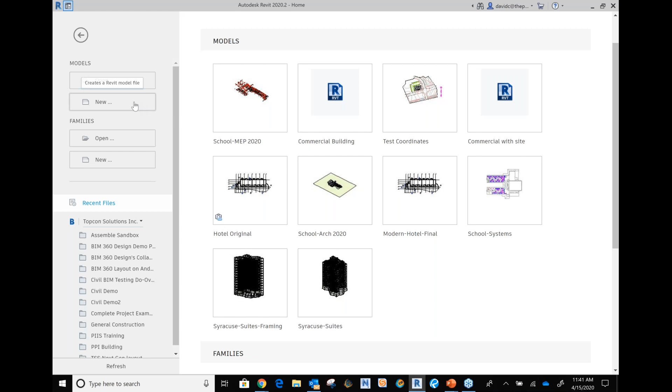So in Revit here, what I'm going to do is start out with a new model. I'm just going to go into the architectural template and okay. A couple things I wanted to talk about as I get into this - of course, the survey and base point, but also let me get into my 3D view here. I wanted to talk about the internal origin.

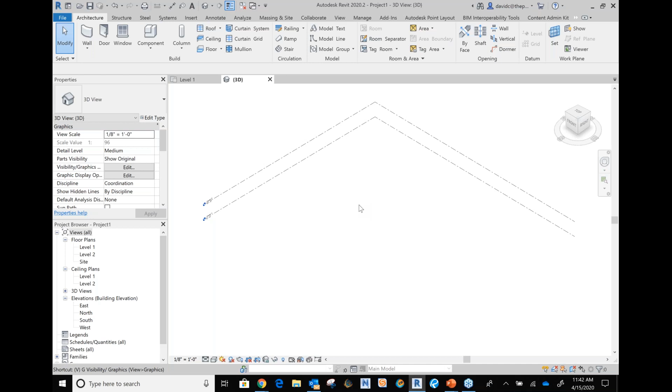The project and base points, as well as the internal origin, are going to be found under Site in your visibility graphics. So here's the internal origin, here's the base point, and here's the survey point. Of course, with this template, everything's located at 0, 0.

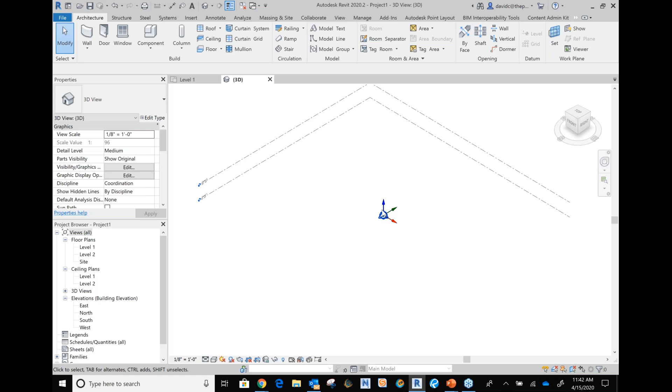With positioning of these models, being able to show that internal origin in both models is going to give you a really good idea, when you're bringing them in, of kind of what's located where. Now I'm going to go ahead and turn that internal origin back off, since I just wanted to highlight that really quick.

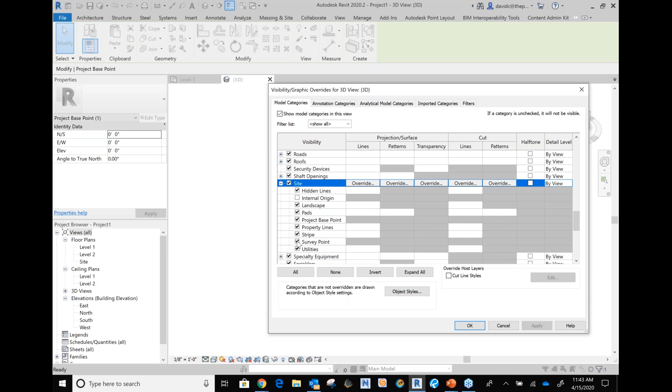What I want to work with here is our project base point. For those of you who don't know, let me go back and turn off the survey point so I can specify the difference here. Okay, this is your project base point.

To me it kind of reminds me of the X-Men symbol, right? You're looking at a circle with an X through it. The project base point defines the origin of the project coordinate system. It's a reference point for measurements across your entire site. Really, this is referencing where your project is.

Then we have your survey points. Let me go ahead and turn this one off for a second, and turn this survey point on. Your survey point is the little triangle with an addition symbol in it.

Your survey point identifies the real world location near the model itself, such as a corner of your property or site, or maybe an intersection of property lines or a geodetic survey marker—you can utilize that as the survey point. That's going to be those real world coordinates.

Excuse me, just grabbing a drink of my tea there. So I'm going to activate this base point again.

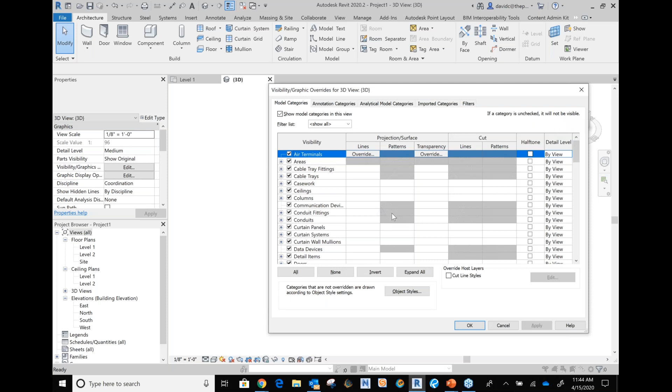What I want to do here really quick, and this is the kind of primer I told you guys about: I've activated the project base point and the survey point, and I'm going to draw a detail line. I'll probably need to get into my site view first—that'll make it a lot easier. I'll get into my site view, then activate the detail line.

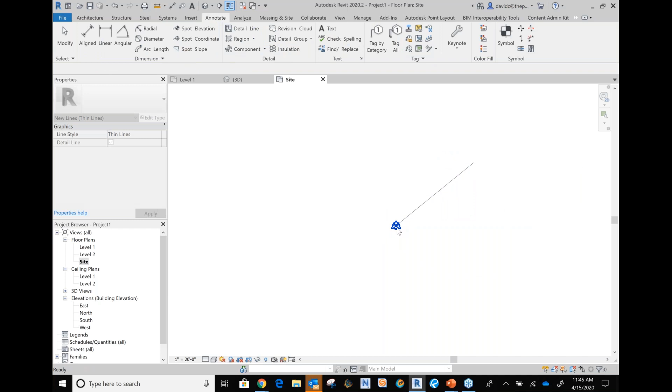So what I'm going to do is draw a detail line. It doesn't matter what the length or angle is, but I'm going to start right at the origin here, right at the center of your project base point and survey point.

After I've drawn that detail line, I'm going to draw a spot coordinate off the end of it. That spot coordinate tells us exactly where this is located. So of course this is 0, 0, right?

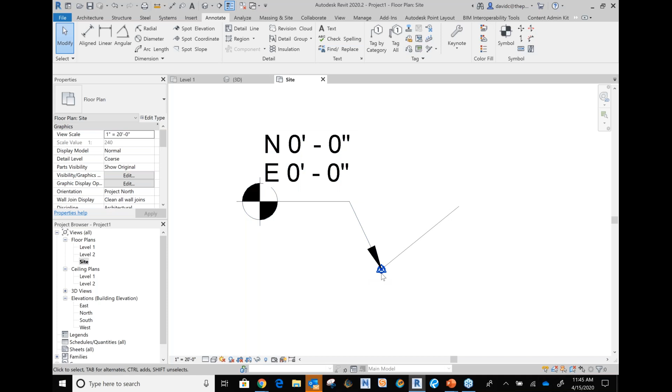So let's say that I grab my base point and I move it. Notice this does not change at all based off me moving that base point.

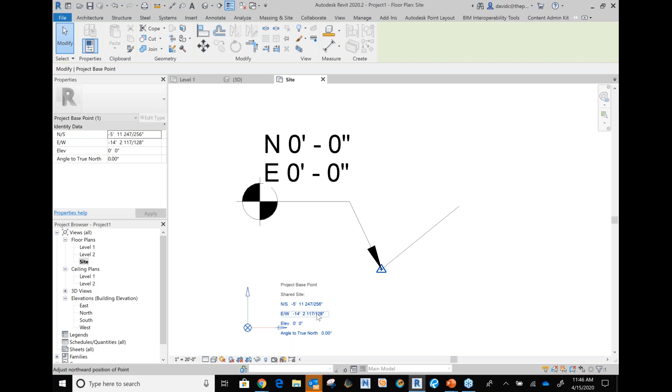It has a new east-west, north and south—so it has new data here, it's reading this new data. But again, we know that this project base point is going to be my origin, right? So I want to specify this.

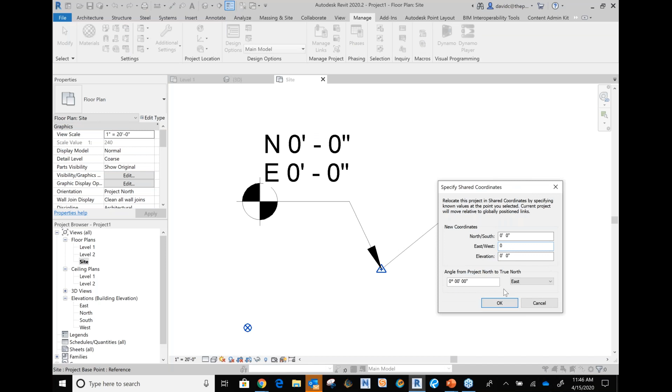That's where I'll go to Manage, and I'm going to specify coordinates at point. This is me telling it, I know where this is. And when I choose this base point to be 0, 0, this changes to reflect that.

So I just wanted to give you guys an idea of how these coordinate systems can work. Now I have another example where I can link another model in, and we can acquire the coordinates from that, do all that stuff. But what I plan on doing now is, since we all have a good basic understanding of this coordinate system, we're going to start by linking, let's say, a CAD file.

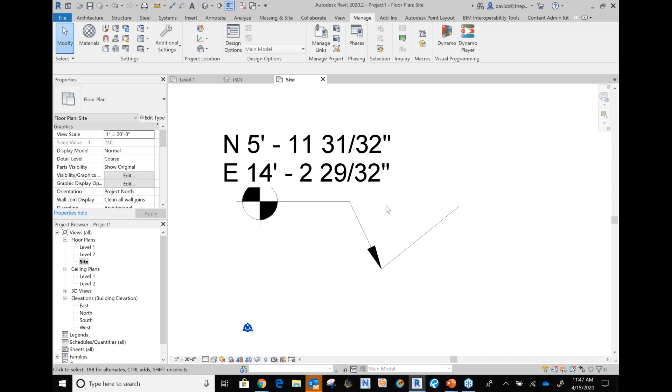I'm going to get out of this, and let's stay in this architectural template here. I'm going to undo most of this stuff and get it back to normal.

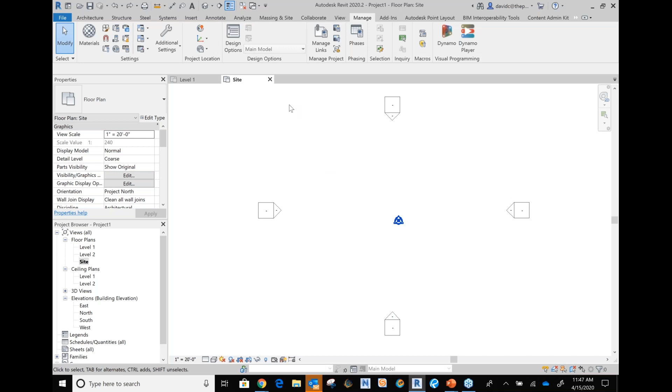So what I want to do is acquire the coordinates from a DWG, and pull that survey data. When I do this, I can go to Insert and link topo or link CAD. I'm going to go ahead and do link CAD for now, and find my documents here.

Okay, what I'll do is grab my DWG or Civil 3D file, as long as it has coordinates published in it. Now you can choose to go origin to internal origin, which is generally really good to do, other than doing the maybe center to center.

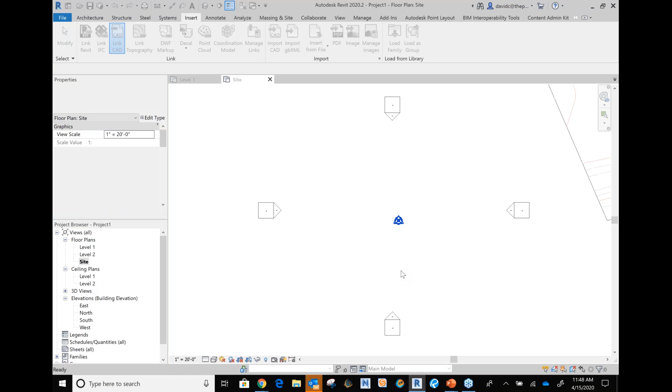But I'm going to go ahead and make sure current view only is checked off, by the way. I'm going to bring it in, and there it is. So when I need to pull that data from that CAD file, this is where I'd go to manage and then acquire. So I'm actually going to pull the data itself.

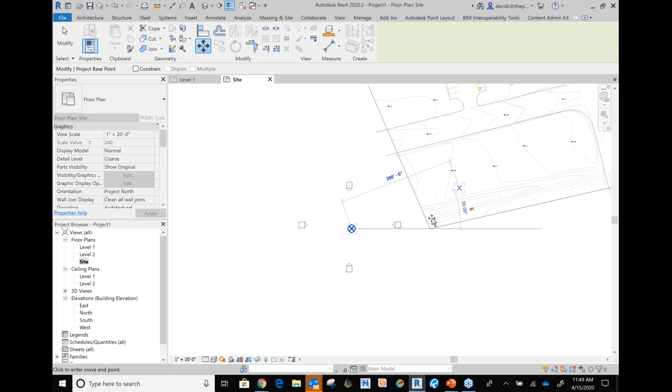And what I want you guys to watch here when I do this, watch the survey point. Notice that the survey point itself has moved to the corner, essentially the corner of the footprint of my building, right? So we know there's a marker here for the site. In this case, I could grab my project base point, move it over to this corner here, and position it where I need to.

Now, in this sense, I have the coordinates for this DWG in this blank model, this nice little template here. Let's say that I want to position my building on this, right?

Now, some of you, the way that this has been done before, and I've been guilty of this too, believe me, and I've learned the hard way with it: I'll link in this CAD drawing into my Revit model, and maybe try to move that CAD file to where it needs to be so it lines up with my Revit model, or I move my Revit model and try to position it right onto the footprint of this CAD file.

And the problem with that is, as you guys know, you either change the coordinates or positioning of that DWG so it goes where it needs to go, or you're leaving elements behind within Revit that stretch if you have a curtain wall or anything like that. Some don't like to be moved. You can break any of your joins, different things like that. We all know those issues, right?

So what I would say to get around all of that is to use something like I'm doing here with this architectural template. At this time, I could go ahead, insert, link Revit, and grab my Revit model. Now I'm going to do it to internal origin, and that's fine.

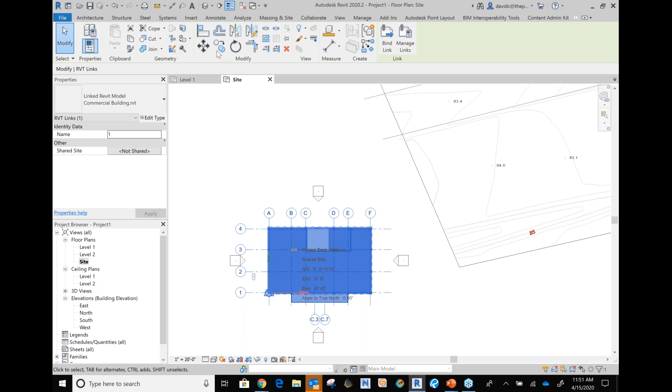Okay, notice this is where it's gone. So I'm going to grab this link at that point, and maybe I want to pull it in with the survey point, or maybe I just grab the corner. I'll do the corner here. Probably would have been better off with the survey point, but there we go. And what I'm going to do from there, rotate it.

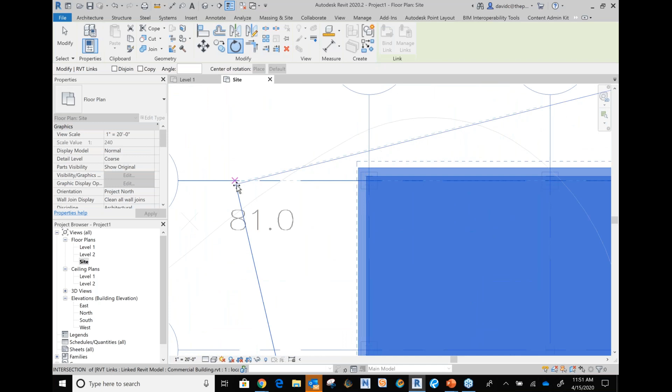Okay, so now my building is positioned on the site. At that point, that's when I need to go ahead and actually go to manage and publish coordinates. Okay, so I'm going to publish these coordinates.

Now, the nice thing here is this pops up asking what the site name for this positioning is going to be used. So if you guys are working on bigger projects with multiple buildings on a site, you can name these individual positionings for these buildings based off of that, so it knows where to go. Especially with wastewater treatment facilities where they have so many different buildings, it's very common to see multiple sites set up so they can assign that positioning to those different buildings.

It's a great tool. In this case, I'm just going to use the internal. I could rename this to my site or building positioning, but I'm just going to leave it with the internal and say okay. Once I've done that, I've published these coordinates into this model itself, okay?

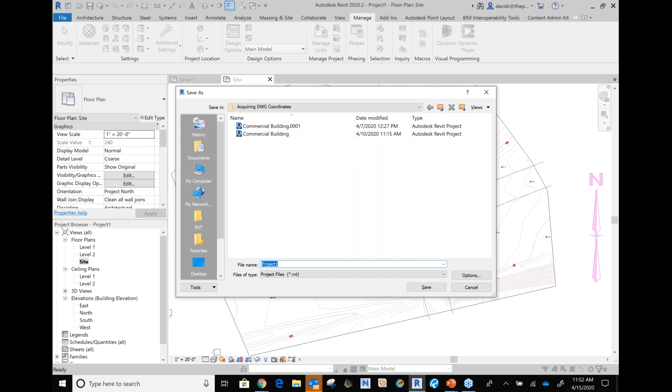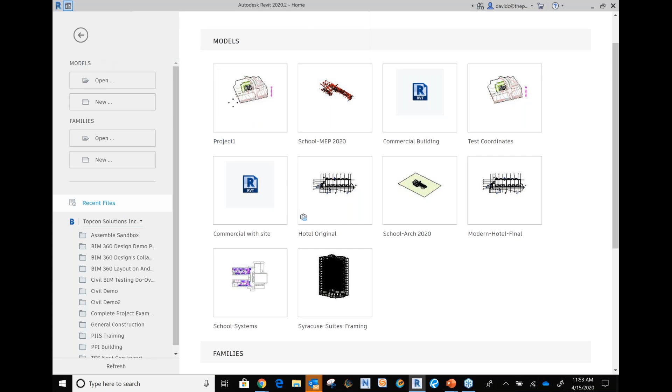And when I go to save, let's actually say I'm going to put this as, yeah, we'll just call it project 1. Let's save. It's going to ask me to save this current position into that RVT model. So if I save this back in, that information is now stored inside of that Revit model, okay? So just to test this out, let's say I go into open, I'm going to grab that commercial building.

And let's say I go to site, insert, link CAD, and I did not link either one of those. Honestly, I did it through that architectural template. And at this point in time, I'm going to go by shared coordinates, hit open, and there it is.

So this positioning is saved back to each one of those models, the CAD file, the RVT model, whatever. I like using those kind of blank templates, or in-between models, to really get all this data together and position these buildings. And as I said earlier, when they're links, I feel like it's a lot easier to really move them around and manipulate them as needed.

And in that sense, you guys can also go through and make any adjustments when you open up the actual model itself. Let me see if I had anything else here. Did you guys have any questions based off of that? I know that was quite fast and furious.

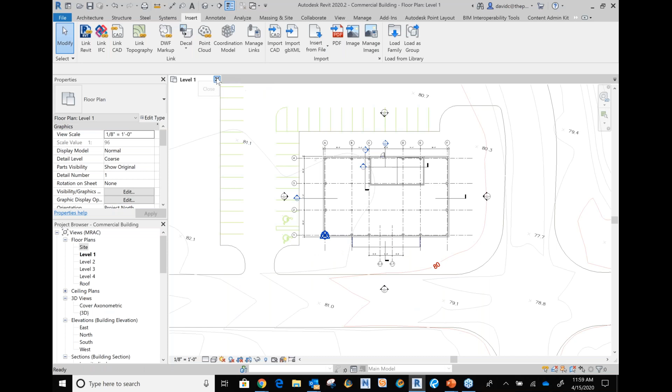Yeah, of course, that'd be great. Okay, excellent. So I'll go back again and do new, and do an architectural template, and I'll start back from the acquire coordinates. Does that sound good? Okay, we'll go do here.

So essentially, again, I would go ahead and insert any model. In this case, I'm inserting a survey, going from that CAD DWG, but if you're structural or mechanical focused and want to pull in this architectural model, it's the same kind of workflow. You can acquire the coordinates from that and then position your model and save it.

So in that sense, I would go link CAD, and I can also do Revit, just strictly Revit if you wanted to do something like that as well. Now, since I'm going brand new, I'm going to go origin to internal origin, origin to origin, and bring in my DWG here.

At that point, I would go to Manage and acquire coordinates here. This is under project location and acquire coordinates. What I'm doing is matching the real world location of any survey marker, that geodetic survey marker, or intersection of property lines, corner of the site, or corner of the building in this case, from that model. At that point, I've acquired the positioning of that model. It knows where it is.

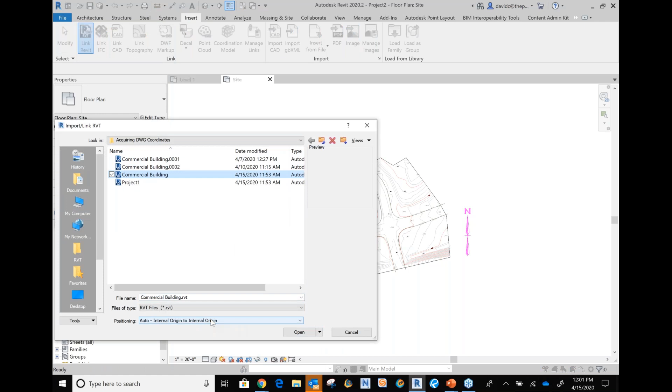So if I go and move this one again, maybe I'll just put them right over the top of each other. Okay, at that point, this is when I would go ahead and link in my other model. So I'd go ahead, link Revit, and grab that commercial building, internal origin to internal origin, or center to center.

Okay, and again, at this point, I like using these links because they move a lot easier, right? I just don't have a lot of things breaking, anything like that. And it's not moving anything in my model itself. It's really just going to save these positioning, like the coordinates, to it.

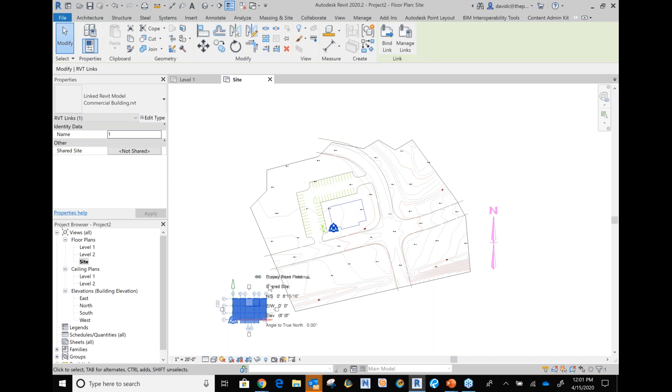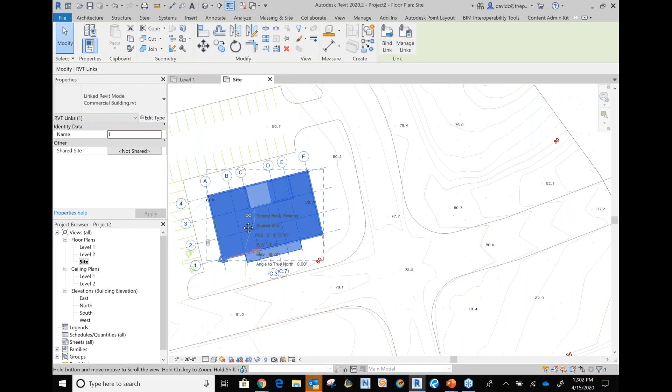So I'll go ahead, move this, put it right here. Again, I'm going to rotate to position my building. All right, now once I have this building placed where it is supposed to be, that's where I go to manage and publish coordinates.

So because this is a link, I'm going to publish and tell this building exactly where it goes on this site. Now, in this case, I didn't do this last time, but I could say building site. Okay, and at that point I say okay. And that is the name of the position of this building.

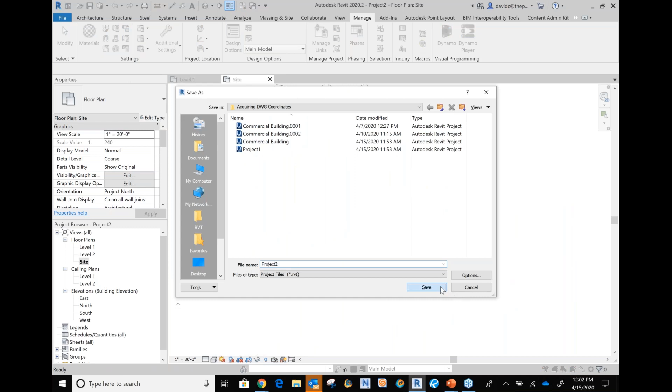Okay, now I would save this, because once I save this, it's going to save the positioning of these models back into them, back into the DWG, back into the Revit model itself. And here's where I go ahead and hit save the position back to the new link.

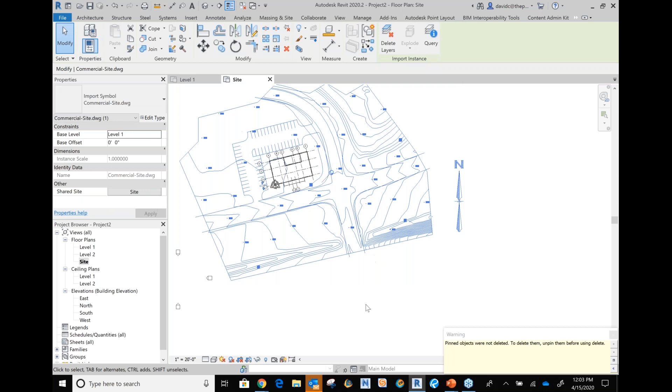Now, if this is coming from BIM 360, what I would need to do is actually, I might have these models there. So let's do this. We're going to go architectural template. All right, so for those of you, let me move this off, that's probably real annoying.

For those of you using BIM 360, for this I would need to go ahead and make sure you guys have that desktop connector installed. You have active permissions to get into the folders and docs, and you have that design collaboration enabled.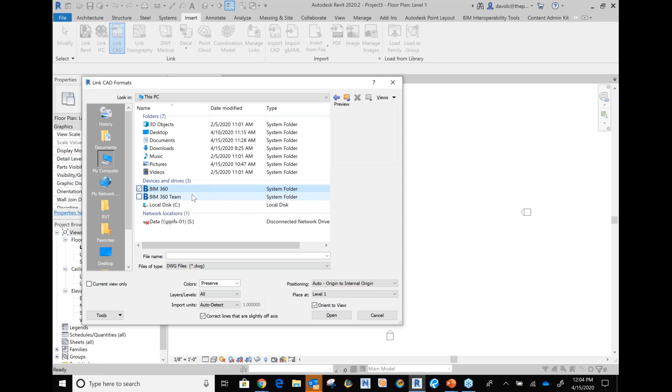At this point, I can go insert, and let's say I'm going to link CAD. This time I'm going to go from my computer. I'm going to find BIM 360. There we go, find my account, find my project, and then find the files that I would want to link in.

So if I have a civil team... that's not the one I wanted. Let's see if I have any other. Well, you know what, just to do it, we're going to go ahead and see if I can use one of these anyways. I'm not sure exactly what are in some of these.

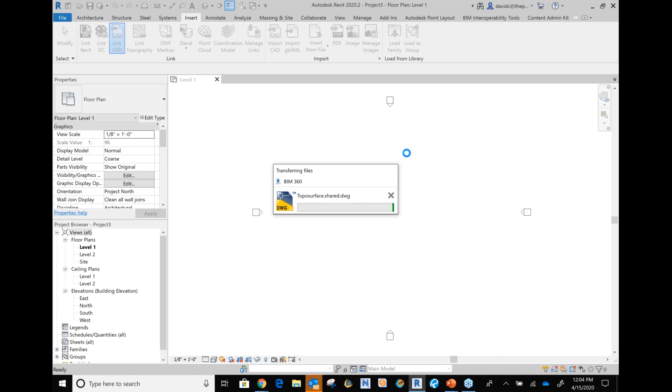Now, one thing to note is that... sorry, I gotta grab one of the models that's been actually exported for Revit usage. Wish I'd prepped this one out a little more for you guys, but let's see if I can find one in here. I know there's one in here, but let me check my links. Nothing. Okay, so I'll grab one of these. I know I have one in here.

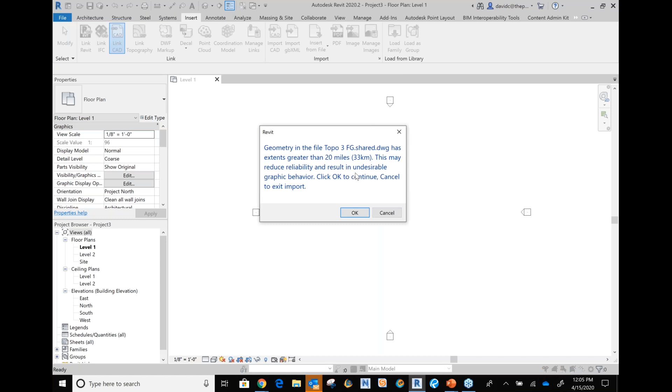Here's the finished grade. Let me try this one. Nope, not gonna let me. Okay, so obviously I need to get... and I know there's one up there, but you know what, let's actually just go straight Revit and forget about the CAD stuff. It's possible to do it through CAD, and I could definitely work with you guys if that's something you're curious about, I just need to get the models lined up first.

Anyways, let's say I wanted to go and link in... where are you? My structure, if I have a structure and an architectural... so I'm trying to find a school project here that I have. All right, let me see if I have another project. Sorry guys, man, I should have prepared for that one a little bit better. But I'm going to make you multitask while you look for another project. Maybe I can read a couple of the questions I think can be answered without necessarily showing on screen.

One of them was whether this feature exists in Revit LT. Are there limitations to the shared coordinates in Revit LT? I'd say shared coordinates, I would think they would work, but honestly I'm not sure because I know you cannot collaborate with Revit LT. You should be able to link though. That's a very good question. I'll have to get back to you on that one just to make sure. Yeah, we'll look a little bit deeper into that.

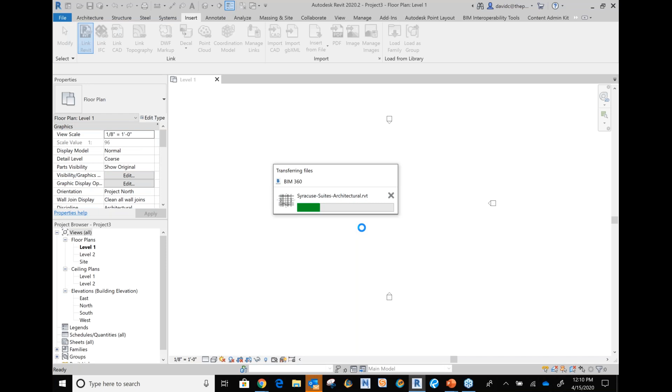I didn't upgrade it before. All right, well, brought in, sweet, okay. So now it's here, okay?

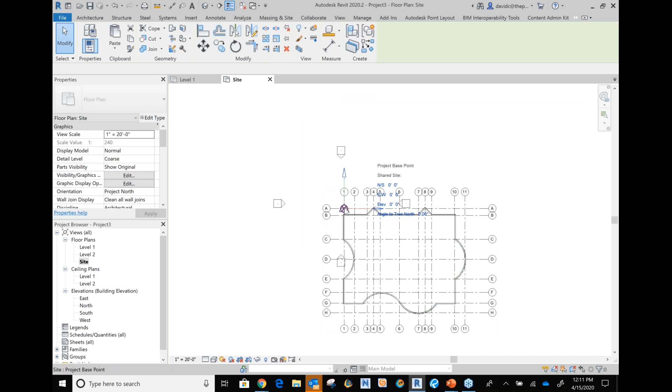And at this point, if I wanted to go into my site, since this is the architectural model, SI, right? And I'm gonna bring up that project base point and my survey point, which they are turned on here. Oh, there they are. Well, that's nice and lined up. If I do the manage and acquire coordinates here, to acquire them off of that architectural model, it's not gonna move because there it is. They're lined up on it as I brought it in.

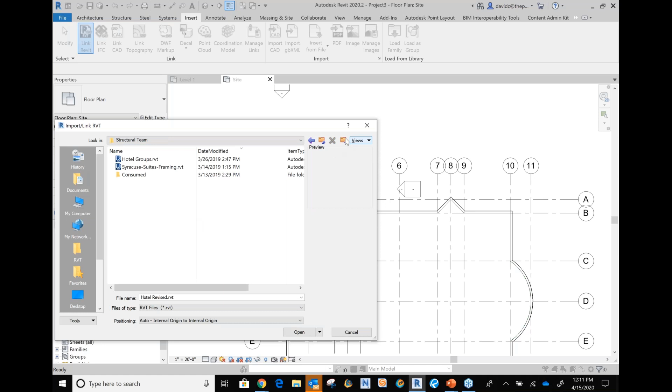But in this case, again, I would go ahead, insert, link Revit, and maybe find, actually, I know I have a Syracuse Suites on here. So that would be a good one. Grab my structural model here. There we go. Okay, so here's my framing. Now here I have my structural model. Okay, so I'll hit open.

Of course, I didn't upgrade that one either. But you know what? In BIM 360, if you guys are working in 2020 and you need to upgrade it, there is a nice cloud model upgrade feature in BIM 360, so you don't have to do it this way. And it does take less time, and it's a good way to get all of those models. And if you have a bunch of links for it, you can get all those links kind of upgraded in that folder. So definitely a nice feature that I should have utilized before this, but we're waiting on it.

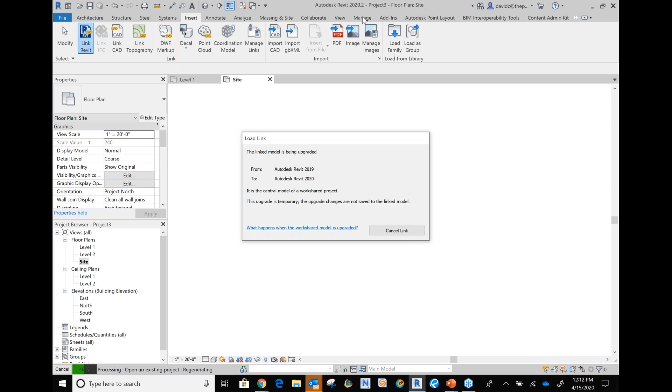What I want to say is, if you guys have these models, so if you're, let's say, going up to BIM 360, like you've been working on a Revit model, you've had links in it already, and you're pushing this up to BIM 360, you will have to go to that manage and manage links, which I'll show that one here.

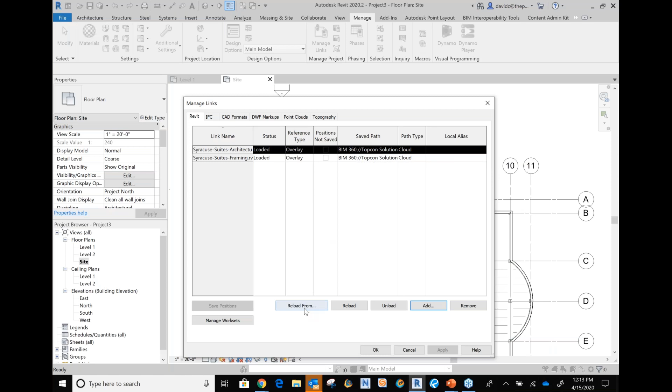Inside of this one, I'll go ahead and show you guys this. But you're going to do the reload, reload from is really what you'd use. So if I know where this model is, which right now it's telling me it's in the cloud, it's in BIM 360, okay? So it knows where it is at this point, I'm good to go. But if it didn't, this is where I would say reload from, okay? And then choose that BIM 360 path.

Now, since I have my models linked together, this is at that point, that's when I go manage and publish coordinates and grab that model. I could rename it to structural, whatever I need. I say okay. Because I didn't upgrade it, it does not want to. Okay, so can we go save? And we're just gonna put that up there anyways.

Right into BIM 360, I'm gonna put it right up there. Okay. Now let's see if it'll let me. All right, well, I needed to upgrade that model.

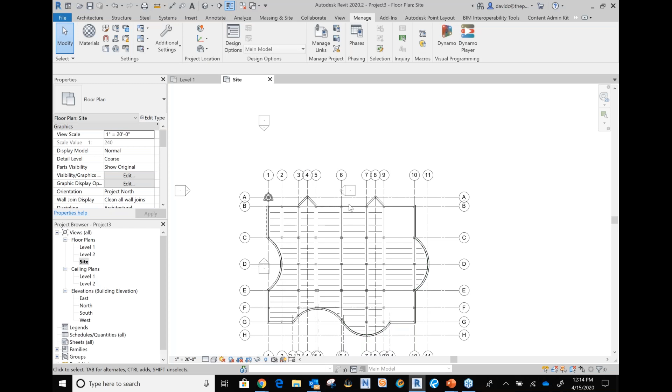Once I upgraded that model, and that's before opening it, but once you do that, you can publish these coordinates right back into that model, and then it's gonna save that information to that model. So when we go to link them from then on, they're gonna line up just as nice as they are right now, except nothing is really ever this perfect in a realistic world, right? Usually there's little kind of speed bumps throughout the whole process, but at least with BIM 360, it's a nice, easy process because I know where the links are going to be.

And again, a big thing about BIM 360, I was going to see if I actually, you know what, I will pull this up real quick and go to BIM 360. It's probably going to take me to glue. No.

So what's nice about BIM 360 is the fact that you guys have versioning, right? It has version control, so as these models are getting updated, as they're either uploaded into BIM 360...

Or let's go into that complete project example. If they're getting uploaded to BIM 360, or if your users are working in Revit and collaborating, you're going to go ahead and synchronize to Central. You can host your Central models here, all in BIM 360, host the links, everything like that.

And when these models update, you're going to see I have version 8 here, version 2, version 3, your link is updating. So if we pull this link, let's say you have permissions, you're working on the structural team, and you have permissions to view this design team here, you can view these models and link them in. Then when they synchronize or publish, you can see everything that updates inside your Revit model because you have it linked in.

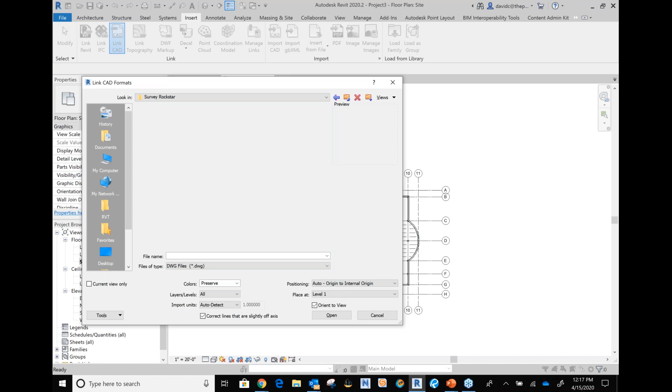I was going to say I may be able to search through here, but I really don't want to take up a lot of your time this afternoon searching through my different folders hoping I have one. But yeah, you guys would just link that CAD file, and as they save changes in CAD or Civil, that link is going to update for us.

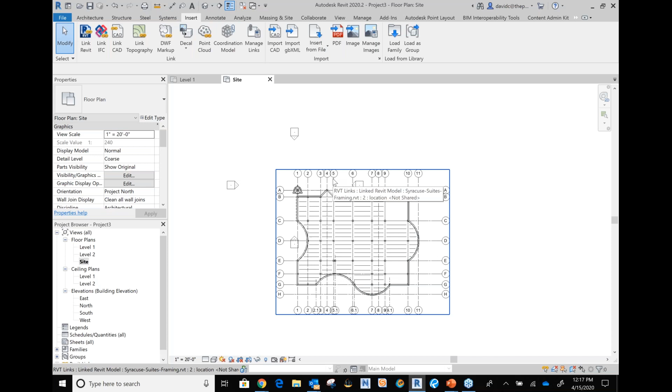Okay, we do have a couple of questions all revolving around the same topic. There's a handful of people asking to review or explain the difference between clip states - clipped versus unclipped. There's even a question about whether that's been done away with in 2021, so maybe somebody doesn't love that particular feature too much. Maybe you can go into a little more depth with the clip states of the survey point and base point.

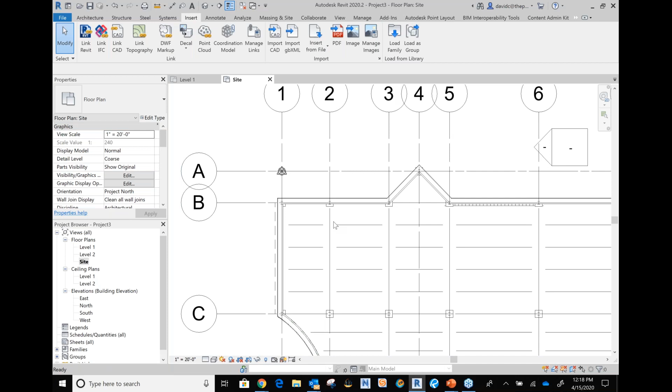Okay, clipping, got you. With clipping and unclipping on the survey base points, you guys are talking about when they are clipped here in terms of saved, and when they're locked and unlocked, right? Especially with the survey point, I know there's been quite a debate with this. I keep trying to grab it, I keep grabbing my link there. There we go.

So with clipping these, really all it's doing is - if you unclip this survey point, you can move it wherever you want, and it's not really changing the information of the model itself. So if I go into my elevations, until I clip this saying that's where it is, I'm going to move it around, and when I clip it, that's where it's supposed to be. It's where it's supposed to stay.

That's about it. I was going to say that usually I see these things staying clipped. I don't see too many of them that are unclipped, unless they have a big survey site - pulling a big survey coming into Revit - and they might unclip it.

This is something maybe I can talk to you guys about offside of this, because it's something I think I would need to look more into to get more in depth with it. I just know that it's essentially locking that positioning of that survey point to something like this - this is it, that shouldn't move.

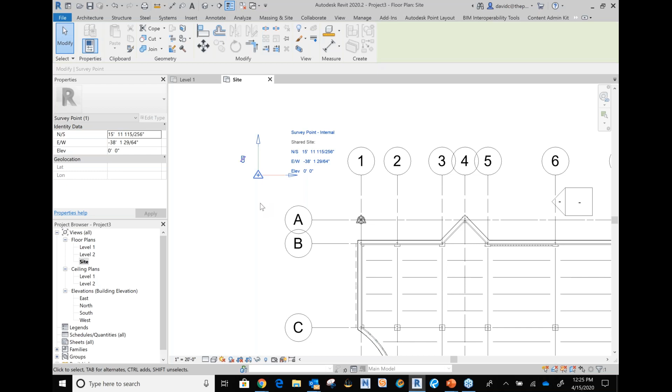So when I go back into my model, it's not going to change from where you had it when you open it up. It's just when you link in other models, you're saying this is where it is. So if that architect happens to do that, what I would do is go through that process again, which is annoying, but it does correct it.

So the first question looks like, does publish coordinates work with models located on BIM 360? Let's test this out.

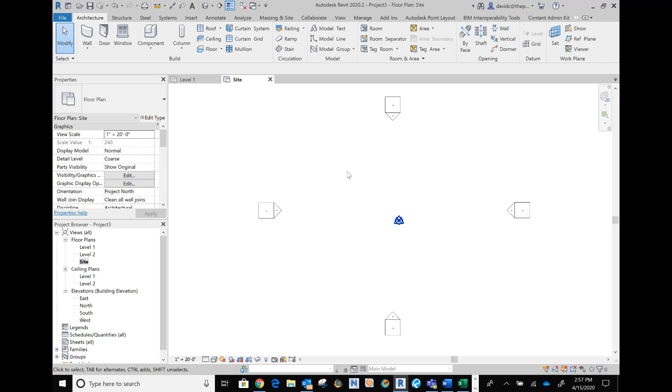I'm going to go with a new architectural template. By the way, since I had some time, I went ahead and prepped a little bit better this time and put my models onto BIM 360. You guys remember that awesome school I was telling you about earlier? I went and loaded it up so I could use it this time. So I'm going to go ahead and start with my architectural model. Notice I've started in a base template on my local.

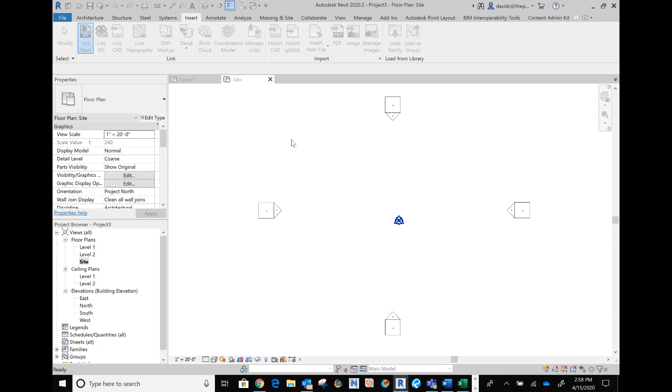And I'm just going to go ahead and link these in. So I'm going to start with this first one, internal origin to internal origin, and then go. Okay, it's going to bring this model in, and remember, as we talked last time, I'm going to go ahead and acquire the coordinates off of this model when I pull it through. As soon as it populates here, I'm going to acquire the coordinates.

All right, so that link has populated. So what I'm going to do is, of course, manage coordinates and acquire coordinates. As soon as I acquire, you're going to see my survey point jump to match the other survey point. So there it is. Perfect.

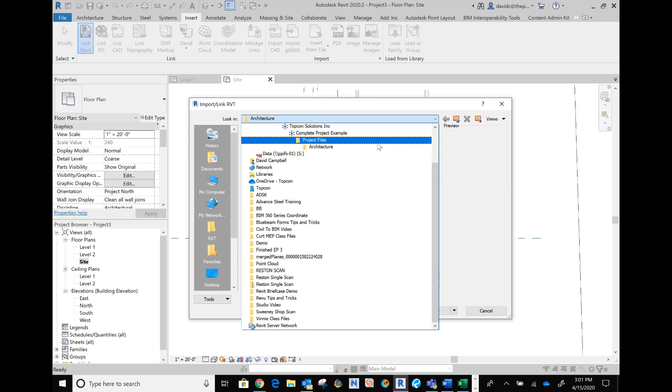So now at this point, that's where I'd go ahead, back up, link Revit. And then I will go ahead and find my MEP model. So here's my MEP model, and just to make this difficult, a lot of times we hope that the origin is going to line up. If everybody models off origin to origin, it would make this process so much easier, but that doesn't happen. So what I'll do is I will go with manual base point.

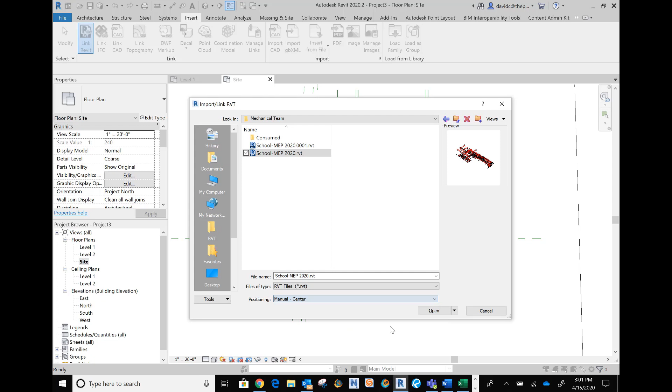That one actually might line up too because my base point is lined up. So let's go manual center. Okay, that's probably going to allow me to put it off somewhere. And actually, I think this is great for if you get a model that maybe changes, right? So somebody moved the positioning of that model. What we might need to do is position that model correctly.

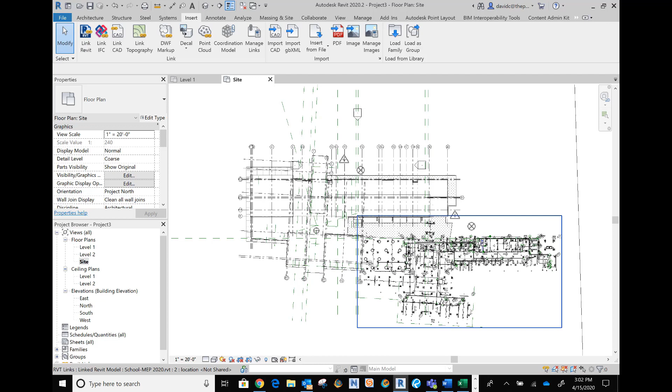All right, so here comes that model. All right, here it is. So I have my link right over here. It's finished loading. All right, so there's my model. At that point, I'm going to need to turn this back on so I can move this if I need to. A lot of times you can move the base point to the base point. That is what I would do here.

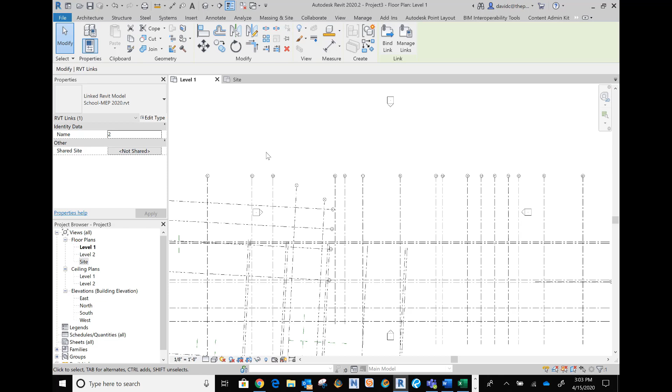If they do not line up, feel free to use your grid lines, anything like that. Use any of that data that you have available to you. Just to make sure, if I go to level 1 here, I don't know, okay looks like they are lining up.

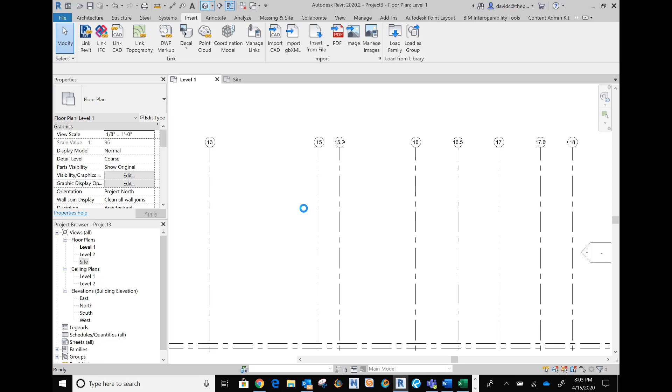Just to make sure, we're going to check it out in 3D view. All right, and we look good. We are good. Okay, so at this point, what I would do is go Manage, Publish Coordinates.

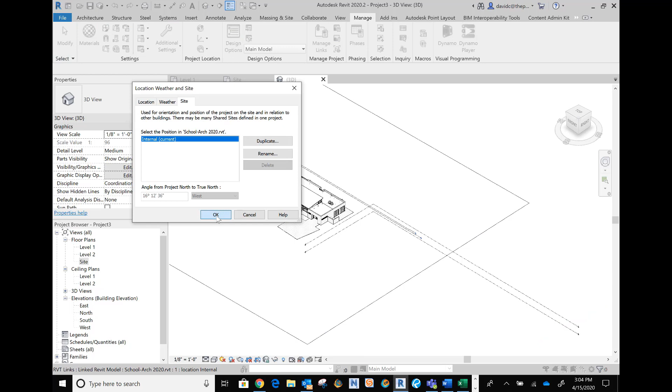All right, and I'm going to choose my link. And I'm going to go ahead and say okay, I have published those coordinates. Now at this point in time, I do need to save this.

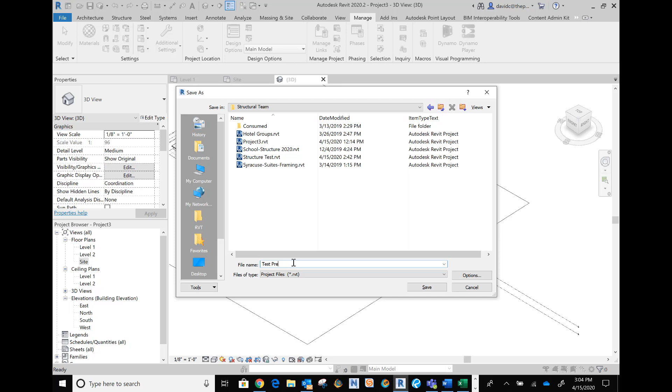So I know this is, let's say, going to be the structural model in this case. I could go ahead and push this into Project Files, find my structural team. I'm just going to call this Test Project. There it is. Okay, now I'm saving this because, as you're going to see, I'm then going to save the positioning back to my other models.

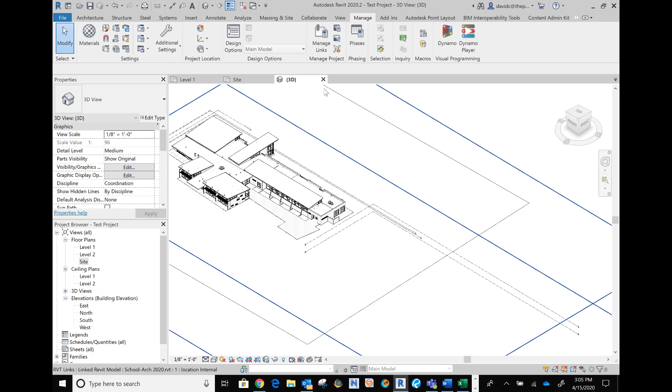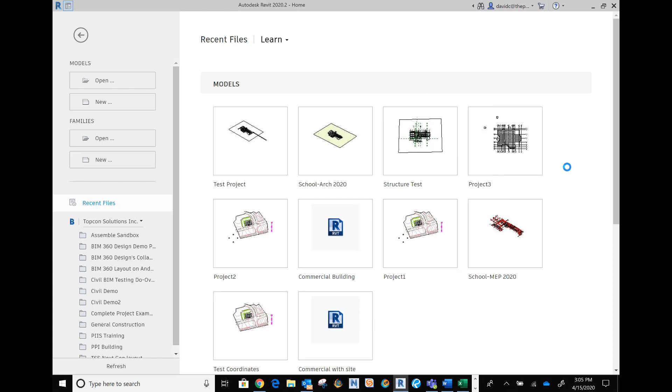All right, so just to test that out, I'm going to close out of all of this. And I'm going to open up. Let's go ahead and grab that architectural model here. Okay, we're going to open the architectural model, and I'm going to link in the MEP by shared coordinates. All right, I'm going to go ahead and pause this while it's opening. All right, so it has opened.

At this point, I can go ahead, Insert, link Revit. And let's go ahead and grab my MEP model. Make sure we utilize shared coordinates and open.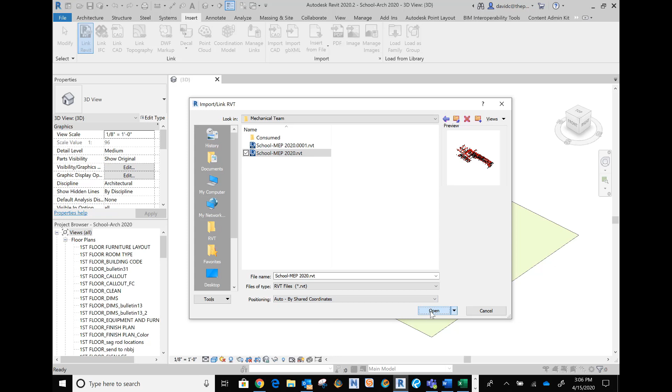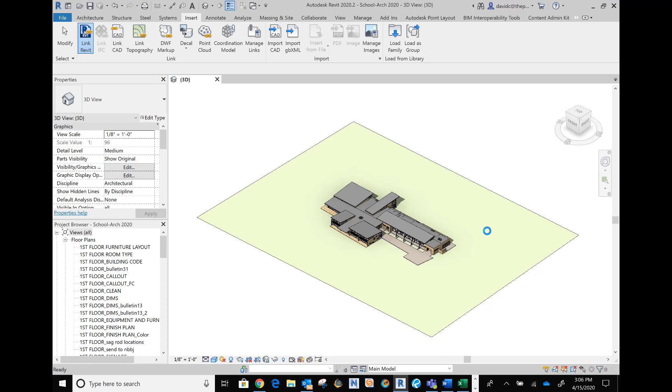All right. All right, we'll give it a second to load up here. There it is. All right.

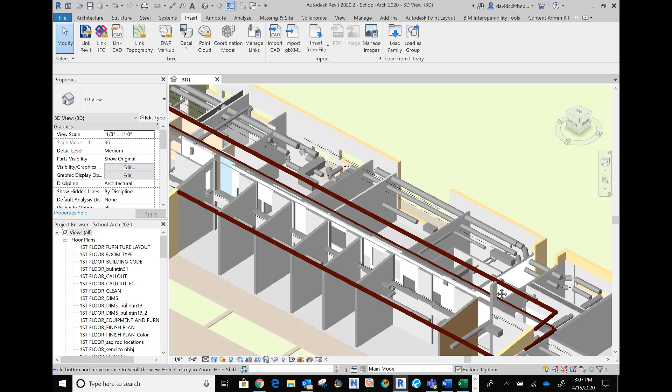Comes in right where it needs to. There we go, we can see the full MEP model. All right, so that answered the question of whether that works on BIM 360. I would say yes, it does.

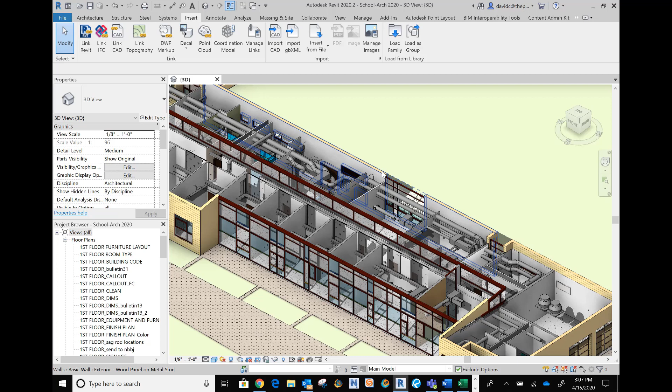The next question was, if someone messed up and published the wrong coordinates to the model, is there a way to overwrite and republish coordinates? So essentially, yes, you're going to place them wherever we need them. And when you publish those coordinates again back to that, you're essentially saying that's where it's going. So that's kind of doing an overwrite for you, okay?

So I'll show the acquire coordinates. We have another one - can you show the acquire coordinates? Actually, that feature does not exist in Revit LT. You do not have the collaboration capabilities. I looked that up on Autodesk's website, and you can still link in these different types of models, okay, but you will not be able to utilize those shared coordinates. So we won't be able to do that.

All right, next question is, after acquiring the coordinates from the survey, typically the survey point will move miles away. How is this survey point moved back to within Revit limits? So with this one, if you do acquire coordinates from a survey and that point just disappears, if it goes outside of the Revit 20-mile radius, it's very hard to bring back at that point.

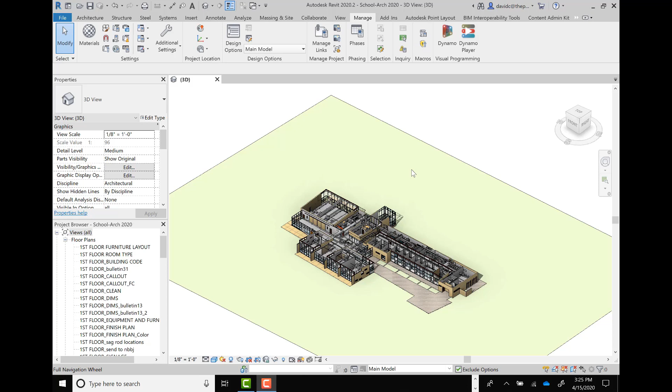And again, I did want to point out that is 2020.2.1, I think it was, where they did away with the clip project base point. Okay, so next question is, what's the best way to match the architect's coordinates after the model has been set up and they move it, without moving the model, so you don't have to reset up the sheets?

So with this question, I think a really good thing to do is, as I showed here, to link those models together. Start with the base template, architectural or whatever, link in the architect's model and acquire those coordinates. Then link in your model, whether it's structural, mechanical, or what have you, and position it where it needs to go. Once you do that, publish those coordinates back into your model and save. At that point, when you get back into your model, all of your sheet data and everything will be the same. Your building itself will be the same. But when you go to link that architect's model in again, it will line up like it's supposed to.

Next question: the host model and the link do not share the same coordinate system. With this specific error, sometimes when you go to link in, I'm guessing this is for a topo surface, typically a Civil 3D topo surface. When it comes in, Revit isn't offering the option to position center to center and align, so it'll kick up that warning to you.

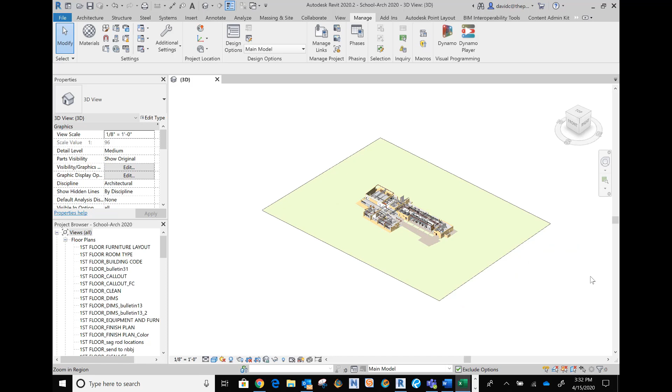Okay, so that looks like I have answered all of the questions on that list. If you guys have any other questions, please feel free to reach out, and again we'll help as much as possible. Thank you for your time.